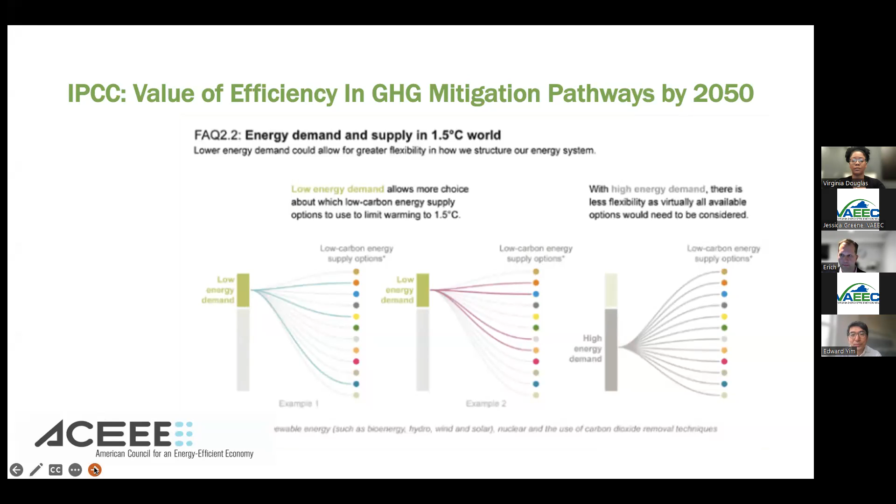So next slide, please. More specifically, some of these climate mitigation researchers did a study 10 years ago about the cost and feasibility implication of reaching a previous goal of 80% greenhouse gas reduction by 2050. And really, this finding is pretty astounding to me, because they found that business as usual would allow about 5 pathways for a various combination of mitigation technologies at a cost of about $24 trillion.

But with a significant demand reduction, again, roughly 20 to 30% demand reduction from the business as usual level, it would be 70% reduction of business as usual, rather than 30% reduction of business as usual, at a cost of $7 trillion. So to me, in the context of climate change, this is the real value proposition of efficiency: savings are multiplied and carried over to upstream segments, or it should be.

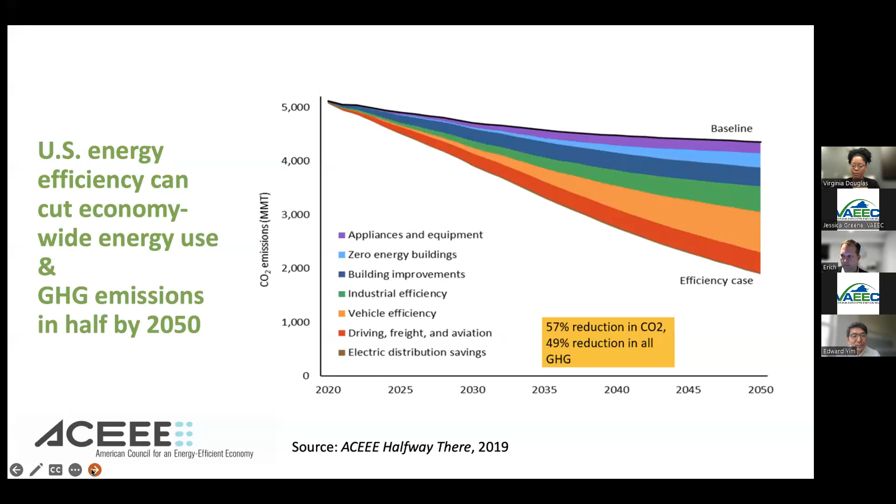Next slide. So the climate forward efficiency really strives to answer the question of how do we get that large amount of efficiency as a climate mitigation tool? So this is our version of that answer. Earlier we published a framework called Climate Forward Efficiency Roadmap that has 9 core strategies. I'm not going to talk about all of them here, but I'll talk briefly about 2 of those strategies here. Next slide.

So really the most important in my mind is setting the efficiency target. It is important that in the context of climate change that we begin to measure savings in terms of greenhouse gas emissions, or at least in terms of BTUs. But ultimately, the saving metrics really will not matter if we don't save enough.

With utilities nationwide saving an average of around 1% of total energy use, to climate researchers or policymakers, this number could look too small. And I'm mindful of all these efficiency potential studies that indicate a savings percentage that go well into double digits, only to be drastically reduced to a very low single-digit percentage, like 1 or 1.5% savings, when we use the model of voluntary customer adoption based on utility incentives.

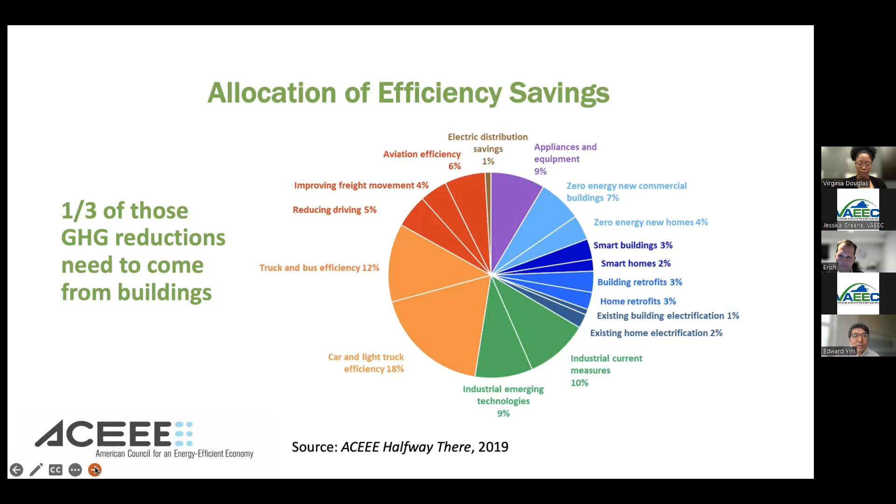So in terms of square footage of the buildings, the biggest challenge will remain with existing buildings, which will make up about 2/3 of all square footage in 2050. However, ignoring new buildings isn't an option, and there are positive trends and examples that consider highly efficient buildings. Constructing highly efficient buildings is becoming easier, cheaper, and more cost-effective.

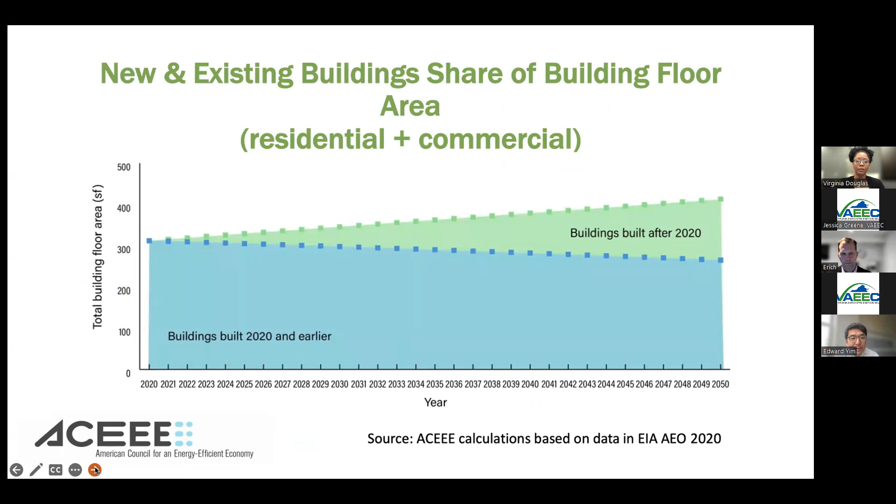So some of the typical policies that will advance decarbonization for existing buildings: energy performance standards, appliance standards are important, fuel switching, and benchmarking will be sort of a prerequisite to establishing performance standards. There's retro commissioning and tune-up, and other market behavior change measures like time of sale disclosure.

For new buildings, again, building codes are going to be the major workhorse. Appliance standards are important. Stretch codes are also important.

So there are some emerging building policies in the utility space, and one I'll talk briefly about is the clean heat standard. My colleague on the panel here, Sean, might talk about that too for New York. But the idea of the clean heat standard is requiring gas utilities to lower carbon emissions.

This year, clean heat standards were enacted in Colorado and Minnesota. It didn't pass in Vermont, but folks there tell us it will likely be reintroduced next year. In Colorado, I believe gas utilities are sometimes electrifying heating as part of their clean heat standard program. That's an exciting development that I think we should encourage.

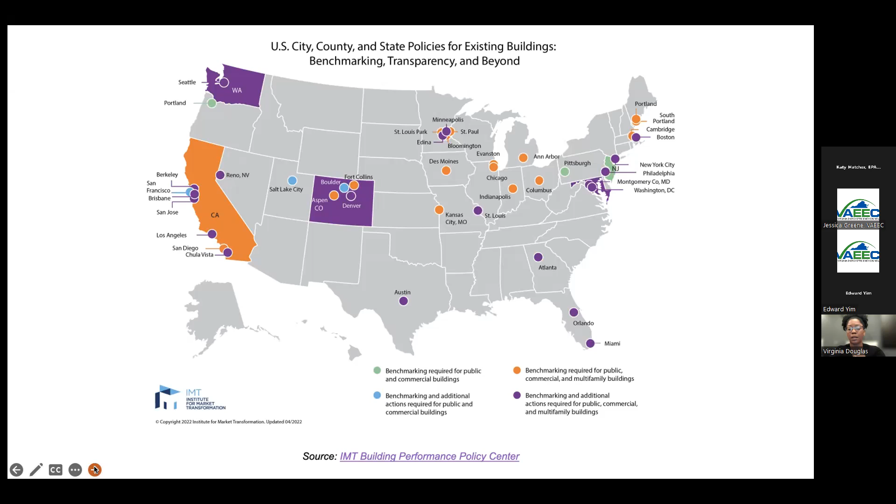So why benchmarking and disclosure? If you think about what miles per gallon for a car has meant over the decades to help understand fuel economy, pre-electric vehicles, right? It's that we're trying to do the same thing for commercial buildings, where you can understand the consumption of the building across all fuels, and then understand it on an intensity basis using energy intensity per square foot.

Tracking this information over time, just simply tracking it and making people more aware of it, makes understanding energy consumption more controllable, and your ability to understand why you need to invest in energy efficiency instead of paying for energy you don't need to the utility has been the philosophy that the Energy Star program has brought forward between building owners and product and service providers.

In the last 10 years or so, jurisdictions decided to become more involved in this to bring more transparency about building consumption to building owners and tenants, and that's where the disclosure initiative grew into being. Since Portfolio Manager is owned by EPA, it's a public good that can be built upon for this purpose by states and local governments. To go along with that trend, states and local government programs that had benchmarking programs often then moved to having requirements for audits, assessments, and retro-commissioning.

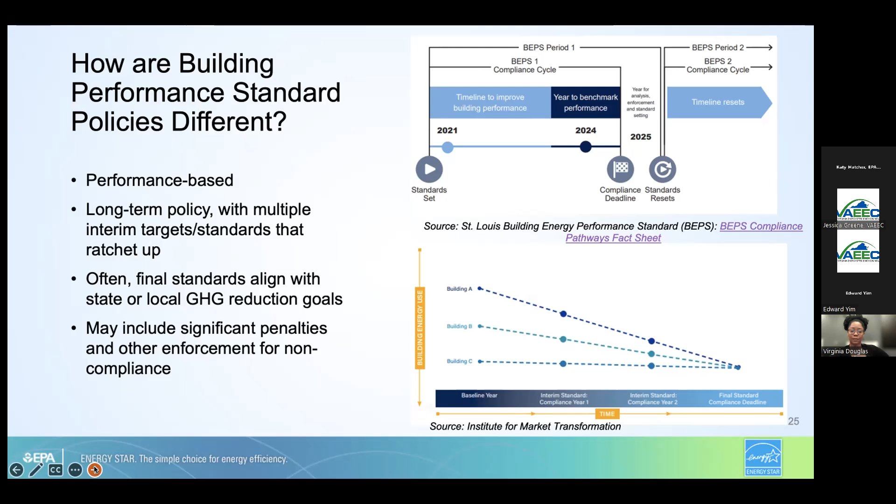The reason why it could be good to have some consistency in these frameworks is to help building owners that have properties in more than one place across the country. That's actually one of the main reasons.

Some of the variability we're seeing across the country right now is by building size, type, performance levels and metric choices, levels of penalties and other types of enforcement, the time frame of the policies, and so forth.

Also an area where we're particularly focused is the interest between states and local governments and building owners for normalized consumption, to understand how someone's unique business activity could be affecting their consumption pattern. And of course, data verification is incredibly important as this information is beginning to be used for enforcement purposes.

Again, EPA is not involved in the enforcement of these policies. These are policies adopted by states and local governments, and it's their own enforcement that they would need verified data for.

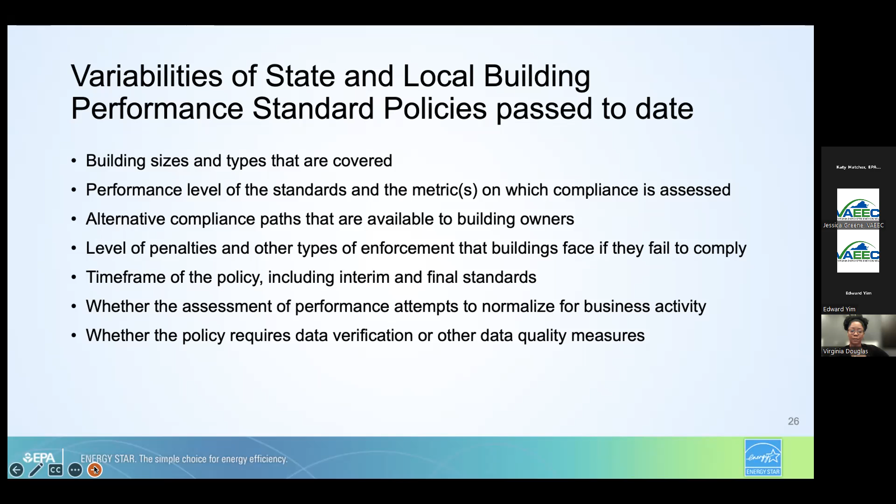So to help create some shape and standardization in this area, EPA created a benchmarking building performance standard policy toolkit. It has 4 chapters, one focused on benchmarking and transparency and why that is a good precursor to having a building performance standard.

The idea there is that understanding the performance of the commercial buildings in your jurisdiction is important to understanding what kind of performance targets you might set if there is an interest in pursuing, at the policy level, a requirement for a building performance standard.

It's also really important for states and local governments to coordinate. We are seeing that local governments may be passing policy with particular requirements, and then the state may be interested in passing something with different requirements. For building owners, that could get quite confusing. So how it fits together between the state and local level is very important.

There's a 4th section on data access, utility data access. Not to go into too much detail here, but the main point is that for some building categories, particularly those with multiple tenants, it's not possible for the building owner to get whole building data for their property to then benchmark it correctly and understand the investment opportunities across the whole property.

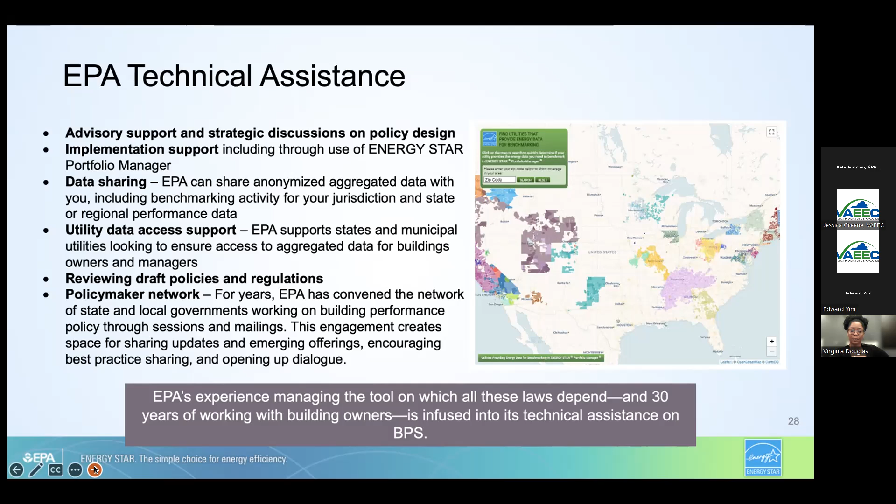A little bit about Portfolio Manager: it's the tool used for benchmarking energy use and documenting performance improvements over time. It's also the pathway to apply for Energy Star certification.

A number of local governments are already benchmarking water and using Portfolio Manager to work toward performance improvements for water efficiency. There's also a part of the tool focused on recycling and materials management, calculating diversion rates and so forth, which we expect to see incorporated into some plans that states and local governments have in the future. The tool also has features to track your renewables and green power purchases.

For Energy Star certification, a building that performs at 75 or higher on our scale and meets ASHRAE standards for indoor environmental quality can earn the Energy Star. The data needs to be reviewed by a licensed professional, so Energy Star certified buildings are verified in terms of their performance level. We're encouraging states and local governments with any kind of benchmarking and building performance improvement initiative to also verify data, because if there are incentives or penalties being given out, verification is incredibly important.

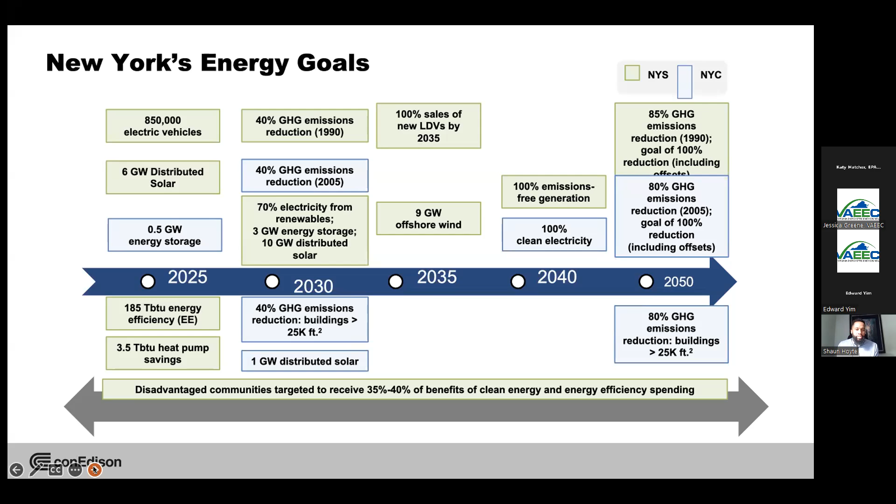On the next slide, please. This slide maps out some of those goals and the policies driving them. The New York State goals are really led at the state level by the Climate Leadership and Community Protection Act. Again, most of those targets you saw on the previous slide are what we need to hit, with a very strong emphasis on electrification and energy efficiency. 22 million tons of carbon reduction through energy efficiency and electrification is what's needed, and that's just going to be a drop in the bucket if we're looking to decarbonize our economy by the goals set forth by the state.

The New Efficiency New York order is a little separate. That's what the joint utilities in New York State are bound to by the New York State Public Service Commission. Currently we're in an interim review, which will show exactly how we're trending towards those goals and maybe adjust what we have to achieve moving forward. But again, it outlines our 6-year EE budgets and goals for all joint utilities in New York State. Something I'm happy was included is $36.5 million to train almost 20,000 New Yorkers for clean energy jobs, which I have a slide on a little later.

For those that aren't aware, NYSERDA, the New York State Energy Research and Development Authority, works at the state level as well. They were responsible for all energy efficiency programs leading up to our energy efficiency portfolio standard in 2009, where they gave the majority of the responsibility to the joint utilities in New York State. At the bottom you'll see Con Ed's response and our commitment to these policies.

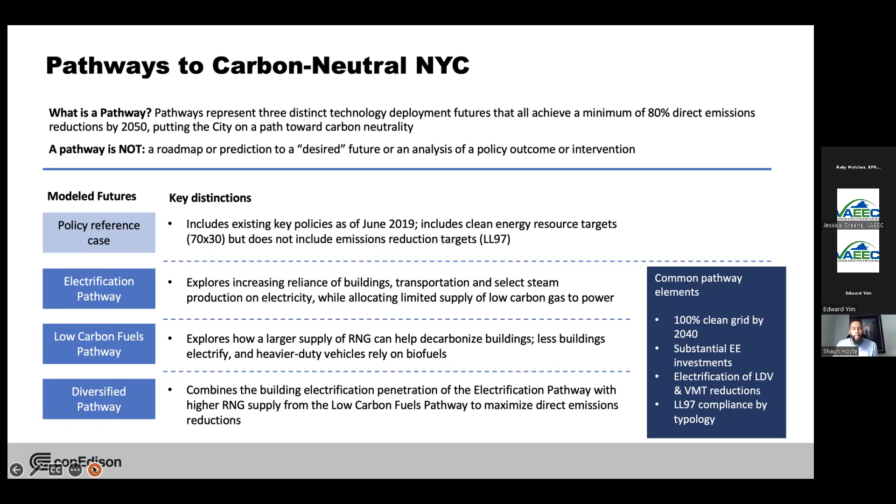Key cross-sector and cross-commodity interdependencies are also what will be needed to be successful in this entire effort. And really the report, the study, identified how these different approaches and measures can help us reach the same goal, including what policies and technologies will be needed to transform these different sectors.

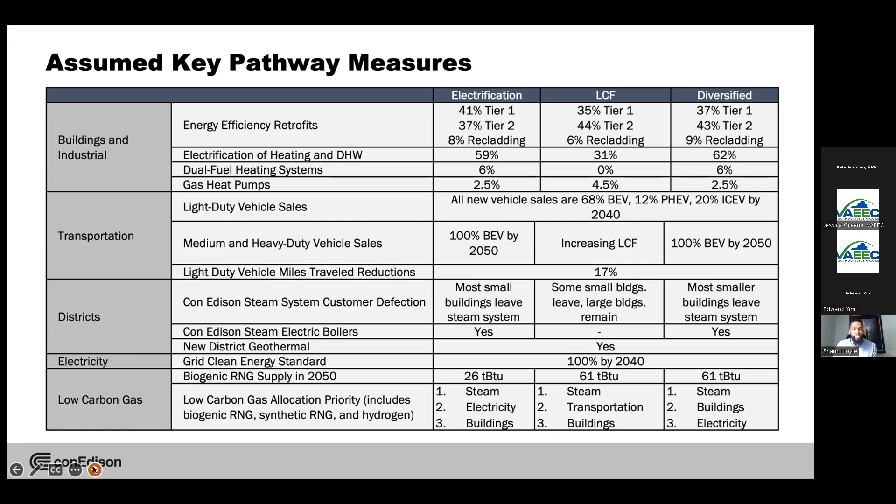Small to medium business program is a program that I managed for several years. That's the storefronts, the bodegas, really the heartbeat of New York City when you think about it. During the pandemic, when restaurants were shut, when all those different social places were closed down, it kind of deflated us until they reopened. So that's what really is in the SMB market segment.

And then large commercial industrial - the Empire State Buildings, the big venues, those really large end users. Energy efficiency has primarily dominated in these 4 core market segments. The technologies that we deployed for the most part has been lighting. Now we're anticipating that lighting will go away in the future.

I think Ed mentioned some codes and standards that would eventually make LED lighting the baseline for buildings, so we have to look beyond that.

We've also been successful implementing refrigeration, HVAC setback controls, and gas measure upgrades for our customers in New York City. For energy storage, we have good projects from our non-wires solutions and non-wires alternatives program, notably the Brooklyn Queens Demand Management Program, where we installed a lithium-ion battery in a low to moderate income housing unit called Marcus Garvey, in a part of Brooklyn. It's one of the first lithium-ion batteries installed in New York City, and we really look for it to be a catalyst for more to come.

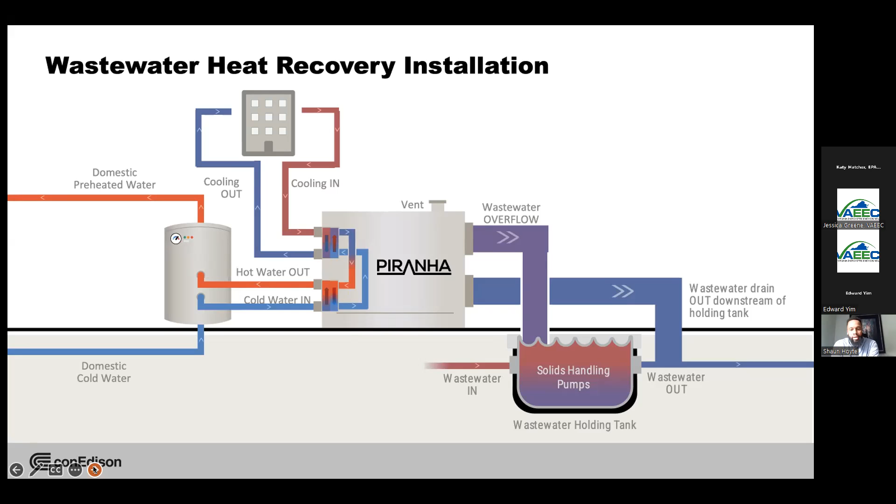The main driver of the program so far has been central air source heat pumps, ductless mini splits, and VRF systems. The primary drivers were within the residential sector, which was a surprise to us and exciting. Customers are picking it up and also decommissioning their traditional legacy fossil fuel-based furnaces and boilers, which is even more efficient for us, because if you're not decommissioning the on-site systems, then really all we're doing is decarbonizing the air conditioning capabilities of the system while you're still running your traditional heating system. We were really taken by surprise at the rapid market adoption, and we're looking forward to getting back to business earlier next year on that program.

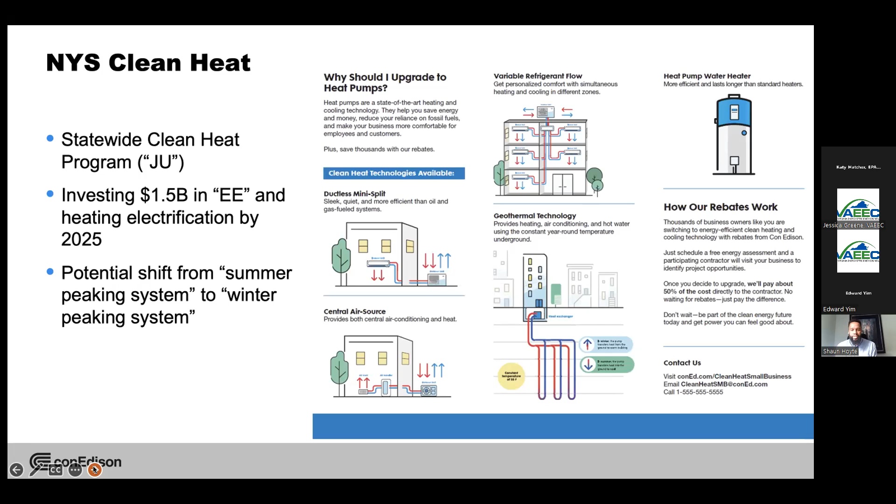We launched it at the end of 2019, had the first cohort go through and graduate in February of 2020, and had to pivot to remote learning because of the pandemic. I'm excited to announce that this November we will have our 500th participant graduating from the program, of which about 150 who were unemployed are now working either for Con Edison, for our implementation contracts, or for our participating contractors that work within the energy efficiency programs at Con Edison.

This is a very important initiative, understanding that for all those technologies we're looking to deploy, our customer base doesn't really have the knowledge—we need a workforce that's able to intelligently explain, describe, and sell these projects to our customers. There's no better way than to reach back out into the disadvantaged communities, where 50% of participants must come from priority populations, and give them the opportunity to really be leaders in this space.

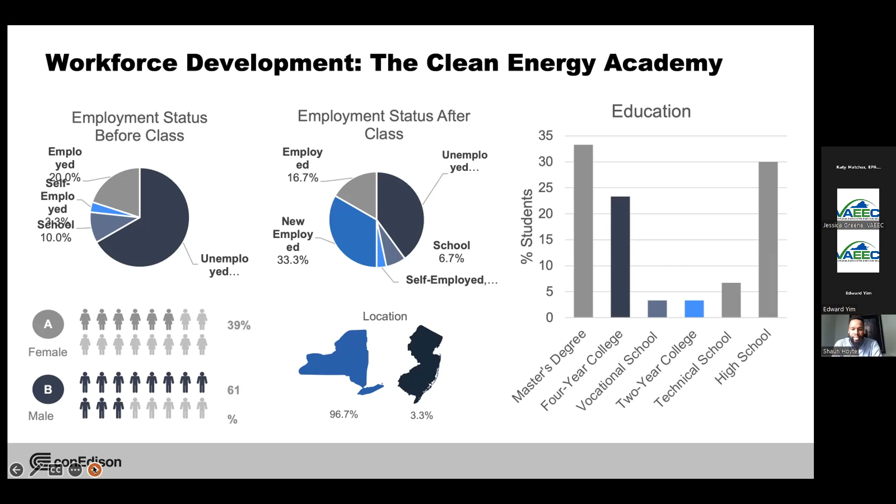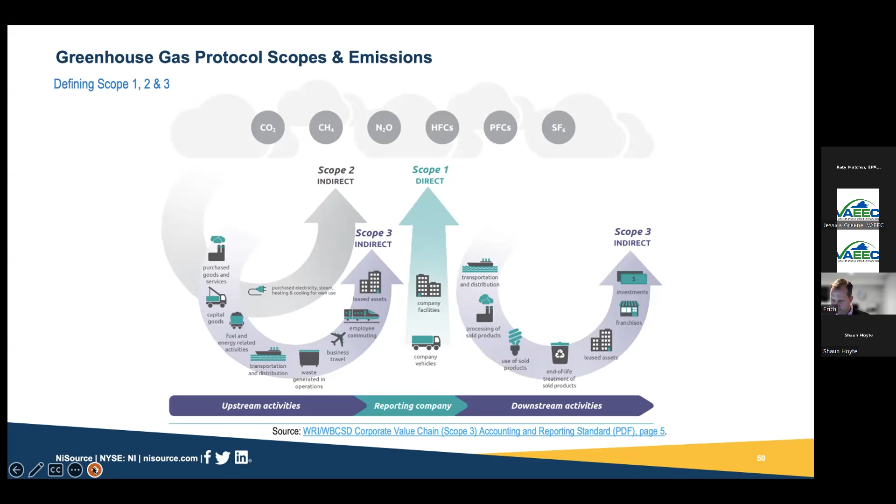We've been focused on driving down methane emissions for many years. Some new things we're looking at: we started using the Picarro vehicles, which are advanced leak detection. These vehicles can drive through our territory much faster, identify and measure leaks, so we can find and repair them faster. We've also started looking at zero emissions vacuum and compression technology, which can depressurize a pipeline we need to work on rather than emitting methane into the atmosphere. We're also starting to look at satellite detection technology as another method, similar to Picarro, to help us quickly find and identify leaks.

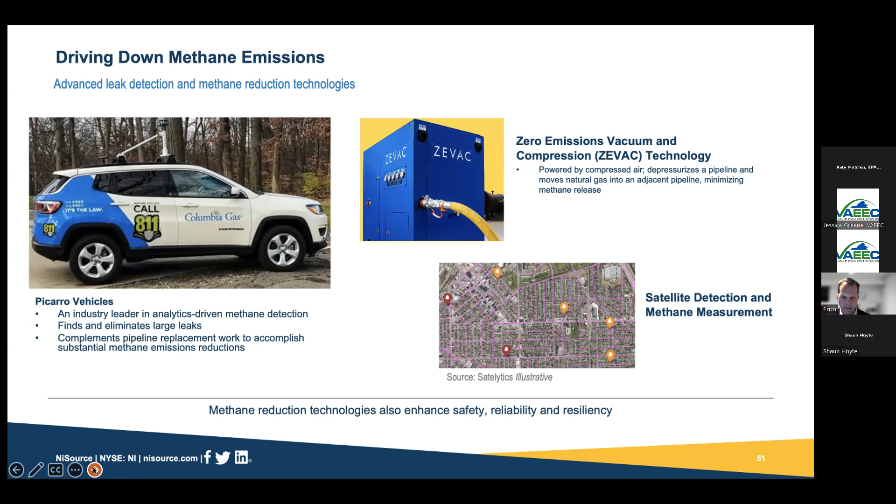As of last year, 2021, we've reduced 32% of our Scope 1 emissions. That's mainly driven by our pipeline modernization through the Virginia SAVE program. We've been replacing and modernizing our pipe, and eliminated all cast iron pipe by 2015. We're continuing to spend millions of dollars every year to modernize the system. As we continue to roll out advanced leak detection, such as Picarro and satellites, we'll continue to drive down our methane emissions into the future.

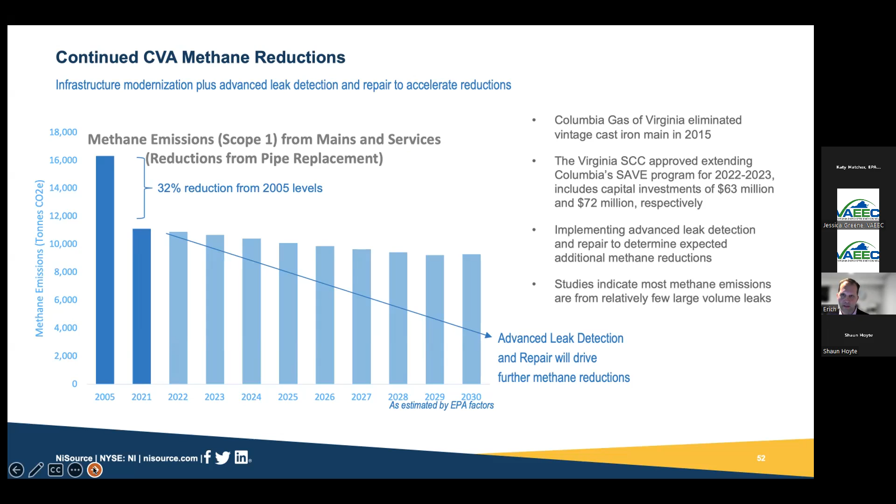The main thing I want to talk about is what we want to do next. As we start looking at Scope 3 emissions, we've developed an example resource mix. Using scenario analysis and existing data we have today, we've modeled out and built what the future resource mix could look like for Columbia by 2050.

This really is a work in progress. It's current information we have today, based on current assumptions on technology. As we get more information, we'll be able to constantly update and review this to find the optimal pathway or resource mix to reduce emissions for our customers.

All the modeling we've done to date came up with this example resource mix. By 2050, this is what we see this resource mix looking like. We came up with it by focusing on affordability, reliability, and stability of energy prices for customers, using a portfolio that supports sustainability and decarbonization, focused on optionality to respond to changing markets and new technology, and regulatory feasibility and local economic impact. We really wanted to maximize those.

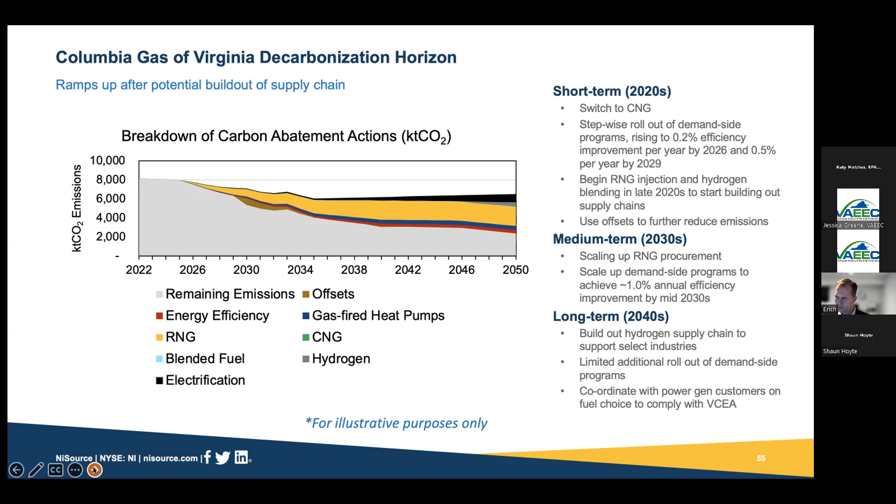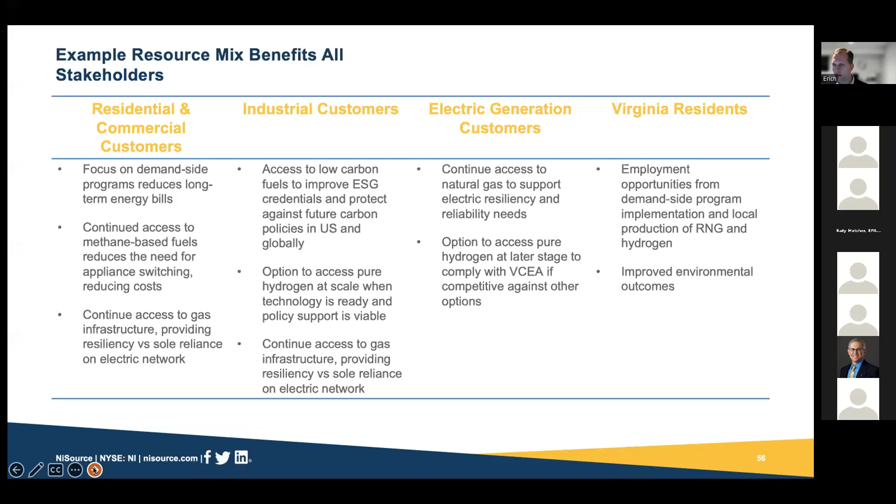As I said, this is something that will continue to evolve over time. It's not going to happen overnight, we'll build up to this. There are a lot of uncertainties that could impact how quickly or slowly this could roll out, and the resource mix I've shown assumes certain outcomes of those uncertainties. If certain things happen, it could speed this up or slow things down - things like state and local policies around building codes, carbon prices, as well as access to grants and subsidies. Domestic gas production could also impact this, as prices could be greater or less than expected.

Customer behavior is another big one. We're assuming customers will get on board and want to embrace new technologies. We certainly want to try to incent that, but how fast or slowly they want to adopt energy efficiency and new technologies could impact the rollout. And of course the technology itself - how quickly is hydrogen, or clean hydrogen, available? Are gas heat pumps commercially available? And those sorts of other technologies.